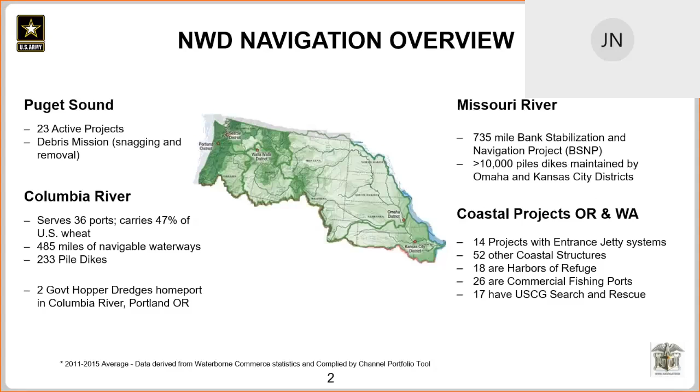And then we've got coastal projects, combination of nav channels, jetties, breakwaters that serve the Oregon and Washington coasts. Huge interest to local communities when it comes to serving the fishing fleets, the Coast Guard search and rescue missions, and things like that. So it's a lot of low-use harbors, but very regionally and locally significant projects, along with the Columbia that serves really the world.

Kevin touched a little bit on the budget.

This just kind of gives you a table that shows the trends of where money's been going overall. This is a breakdown of the enterprise as a whole. You can see what we've got as NAV percentages when it comes to the entire civil works budget and how that stacks up between coastal and inland projects. On the coastal side, obviously, you've got the Harbor Maintenance Trust Fund that funds a lot of the work. Inland side, seen a downward trend on that.

I think for the purposes of this call, most folks are probably just interested on the lock aspects of that, not necessarily folks that are going to be tracking Missouri River work. But it's a highly competitive funding environment, both coastal and inland. Inland's getting very tough because the trend is down and the work has increased. So like I mentioned with the Missouri River, big focus on that, a bunch of dollars being sunk into that, a couple other projects across the enterprise. That makes the pie a lot smaller when it comes to funding routine maintenance on some of our locks and dams out here.

Again, just kind of focusing more for purposes of this call. So Portland, Seattle, and Walla Walla, you can see the breakdown of the totals when it comes to overall NAV budget and how the district's fared the last 3 years. Still, this was buoyed a bit by the jetty work that we've done at the mouth of the Columbia River, but based on percentages, that's a decent chunk of the overall NAV budget that's coming to our region.

And then similar with commerce stats. So these commerce stats are updated regularly. This is the best information we have, but you can kind of get a sense of the snapshot of where the commerce is going.

I won't talk through these too much, I'll just leave them up for a little bit, but you can see what's moving through each district. The following slide has the next 2 districts on there, but you can see what commodities are moving through our locks and dams and our nav channels and get a sense. So obviously on the Columbia, we've got a big grain operation.

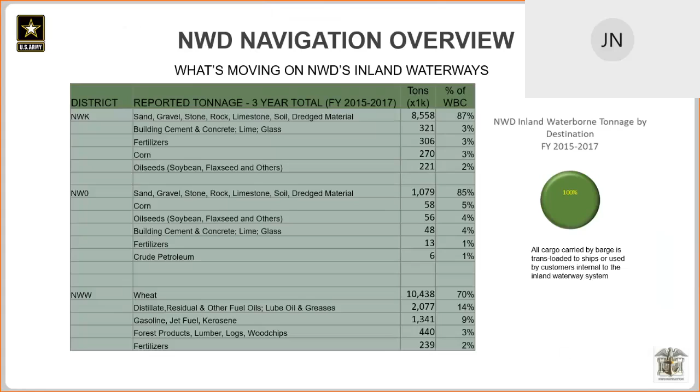Okay, now I'll just run through a couple slides that show a little bit more focus on each of the districts.

So, like I said, the inland side, you kind of forget about it sometimes because of the massive projects we have with the MCR jetties and other coastal work and the dredging on the Columbia River. But there are very critical maintenance needs on the locks and dams we have on the Columbia and Snake, and up in Seattle with Lake Washington Ship Canal. So it's a very unique system out here with locks and dams in terms of the scale of what we're dealing with when we compare ourselves to the Mississippi River.

So it's a big learning curve for a lot of folks, including myself, when it comes to trying to use the metrics for fitting our projects along with the projects across the enterprise, because the scale is so much greater. Failure on these dams is, in my opinion and a lot of folks' opinions who work out here, a lot more critical than a failure on a lowhead dam on one of the systems, maybe on the Mississippi. But it's a very big mission.

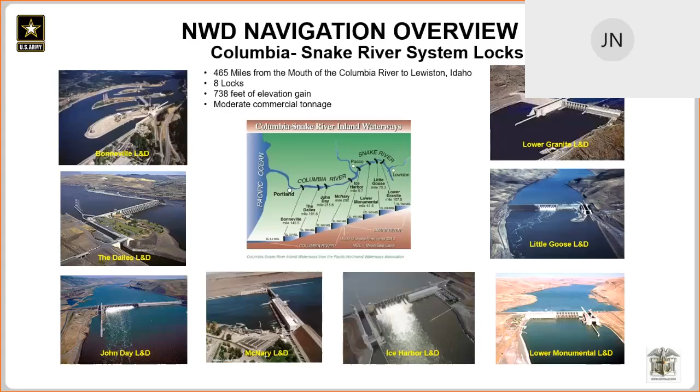When it comes to scheduling these lock outages, I think right now we've got tentative schedules that are pushed out to 2030, and we're trying to coordinate that work with a lot of the lead times to get some of the fabrication done and coordinate with industry and PNWA.

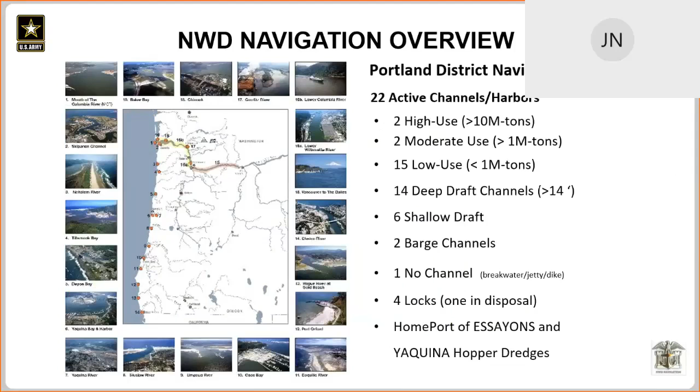Here's an overview of the Portland projects. I think a lot of folks have seen this slide at previous meetings, but it's a list of everything we've got going - a lot of small clamshell type work and Yaquina work that happens on the Oregon coast, and then the Columbia River, coupled with our jetty projects and pile dike systems.

So damaged structures coupled with low water are leading to issues. I think the latest I saw is that they've got 37 areas of concern as of last week. That was down to 12 at one point last fall, and it's spiked back up. So there's a lot of work to be done there.

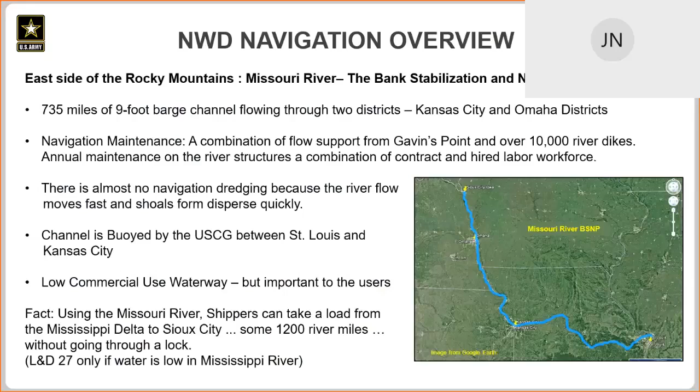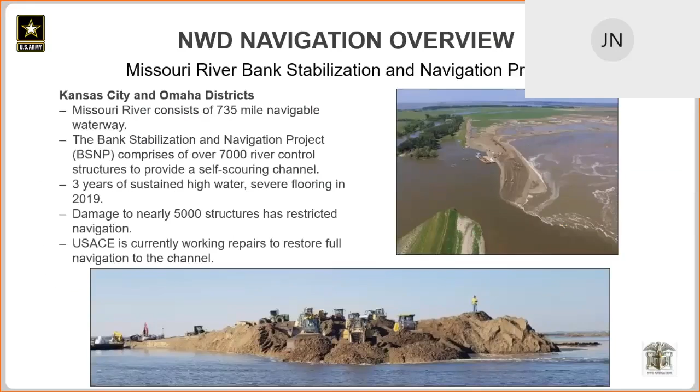And then just some more pictures that we've got of those channel training structures either failing or being repaired. A lot of the work's done with rock placement and a little bit of dredging that ERDC's done with their hydraulic dredge.

And that is a very brief overview. If anybody has questions, I'm happy to attempt them or push them to Mr. Ott.

Thanks, Jared. I don't see any questions in the chat. Does anyone have any questions for Jared?

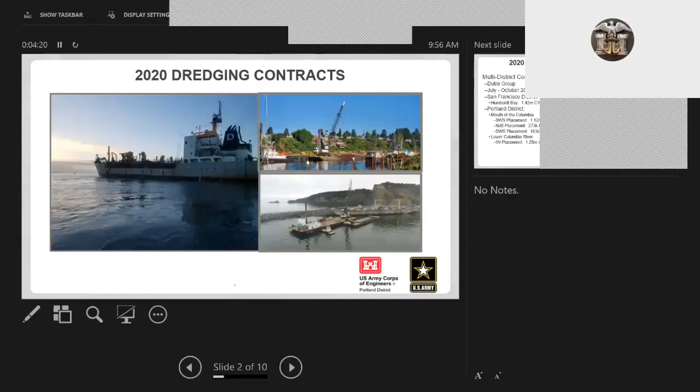All right, so just a run through on our contracts for 2020. We had a total, yeah. Hey, Terry, is there any way you can make your slides full screen? Yeah, I think so. I found this on the... Is that Siri talking back to you? Perfect. Yep. Perfect. Actually, I'm not sure. Display settings. Let me do this. Working through. I will switch to just sharing the screen instead. Is that better? Well, now it's smaller. Great. Okay, I'm going to switch this screen over to... Apologize, everyone. I agree with Dina. I think you just start choosing options under display settings and see if one works. Yeah, if you do the duplicate screen, when you push F5 and get it into the presentation, and then in the view say duplicate screen, it should give you the full screen. I may have just made this much worse for myself. It's going well so far.

Oh my goodness. How's that? Yay, great, okay. I'll just talk through these real quick. I just burned up 5 minutes trying to figure out technology, so strong start.

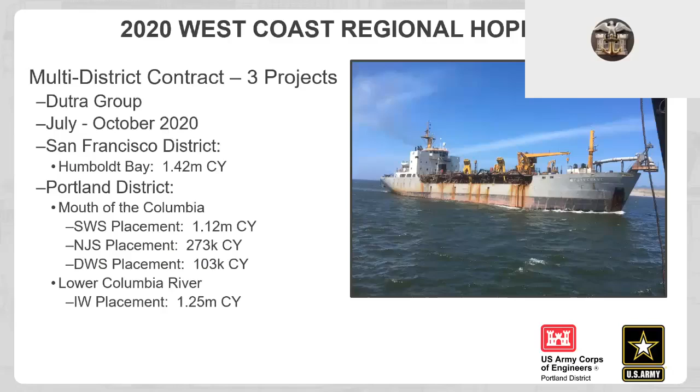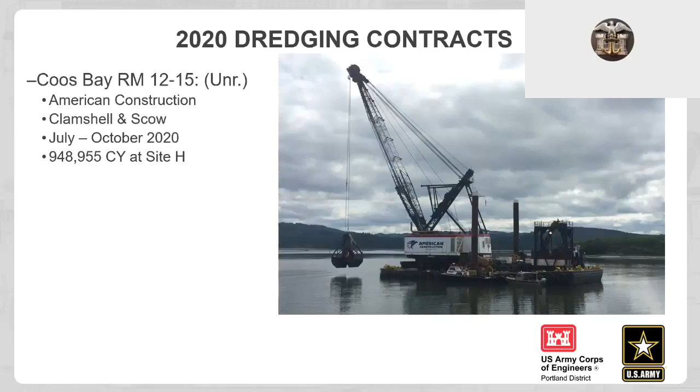Next contract was the Coos Bay River Mile 12 to 15. It went out as an unrestricted contract but was awarded to American Construction, a clamshell and scow project. Dredging was from July to October. Second year of doing this work, same dredge areas, working within the 1 million cubic yard environmental cap we have for placement. So just under 1 million yards taken out to Site H last year, another successful year.

Next contract was our Oregon-Washington clamshell. This is definitely an annual contract for us. The work locations change year to year, with the exception of a couple. It was put out as a small business set-aside contract, awarded to JE McAmis, another clamshell and scow project. Work occurred between August and October, with work at Chetco, Port Orford, Baker Bay, Chinook, and a few locations at Longview.

Chetco, I think we're there every 3 to 5 years. Port Orford and Baker Bay have both been annual for the last several years, and that's been really helpful to keep those projects working well. I think we've got a pretty good handle on how to manage the dredging there. Chinook, I think that's a 3-year cycle. We took quite a bit of material from Chinook last year, just under 140,000 cubic yards, so great to get that work done.

And then Longview, as I said, a couple areas there, both the federal channel and work for the Port of Longview under an MOA with them. So a good partnership there to get the work done in a timely fashion.

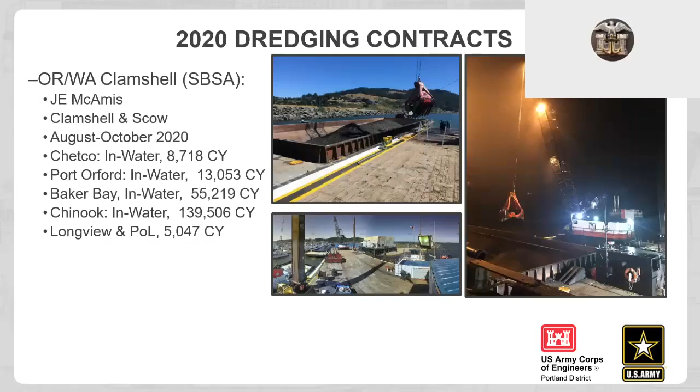The last contract we had for fiscal year 2020 was the Coquille Bandon Boat Basin project. Work was actually done in January of this year, but it was awarded in 2020. It was a small business set-aside contract awarded to Bergersen Construction. They utilized an excavator-mounted hydraulic cutter head dredge, pictured there. Pretty unique piece of equipment, new technology coming into our region, so pretty exciting to see that work.

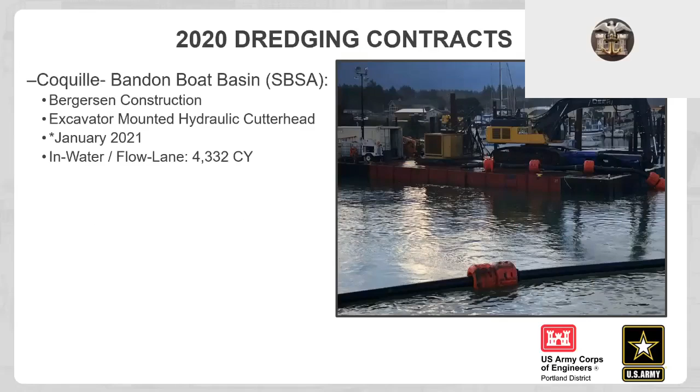Again, that work was done in January of this year. It was pumped to the in-water flow lane site just outside of the boat basin, and just over 4,000 cubic yards were taken.

The Dredge Oregon is our 5th contract. Last year was a fairly standard year, 147 days, more of a return to a typical year for them. The couple years prior, 2018 and 2019, were longer seasons. But last year was pretty standard, June to November, with 8 work locations, including a couple rehandle sites where we reposition sand with a hopper dredge, and the dredge is able to pump it either to a beach nourishment location or an upland site.

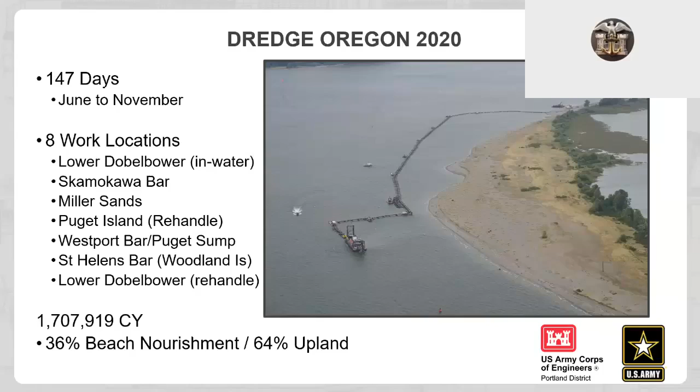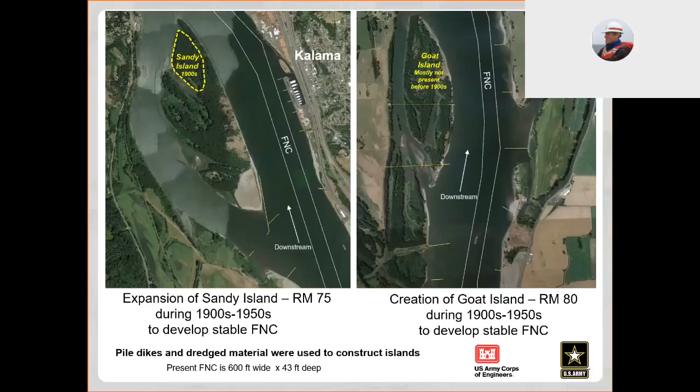But the underlying part is that these islands have ecosystem value in them now, really important ecosystem value that a lot of environmental enthusiasts on the Lower Columbia River think occurred naturally, but we created them. So there's the backdrop here.

Now, the motivation for present-day ecosystem restoration is the fact that 77% of the intertidal and riparian areas of the Columbia River estuary have been lost from the pre-settlement condition due to diking, filling, and hydrology modifications on the Columbia. That's what was motivating. We've got to address this 77% loss of habitat.

And in steps the dredge channel, the sediment that we use. Each year we dredge 6 to 8 million cubic yards of good, clean sand from the lower Columbia River deep draft navigation channel. We put about 15% of that sand in upland sites, about 10% along the shoreline, and 75% back in water, smartly.

We don't willy-nilly dump it in water. We're very careful. Jessica Stokey is very careful to direct where it goes so it doesn't cause problems immediately for the navigation channel. But the opportunity here is that we can provide reliable navigation while also sustaining sediment resources, morphology, ecology, fisheries, and other river functions that depend on sediment.

Solution: use dredge material to restore habitat, morphology creation. So I've teed it up for you all now, but the missing link is how do we move the sediment around? We have some assets that we use in the lower Columbia River, and Terry and others have mentioned them. Jared's mentioned them.

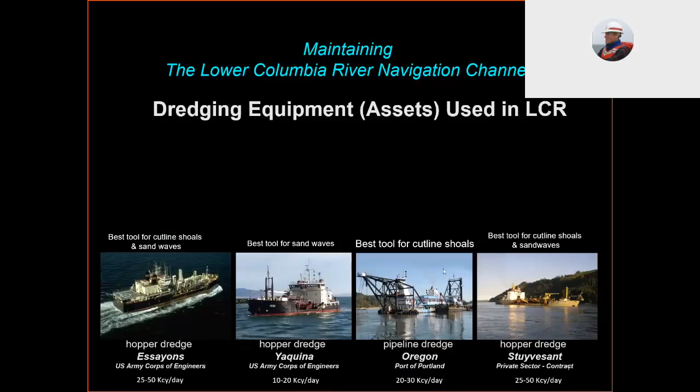What I'll be featuring in the talk today is how we used the dredge Oregon with the dredge Essayons feeding the Oregon with dredge material, so that the Oregon could pump it to our ecosystem restoration project, Woodland Islands, restoring habitat.

Why did we pick Woodland Islands? If you have questions why, direct them to Jared Norton in the chat, because he helped us narrow down from about 15 sites to Woodland Islands. Why? Because of its proximity to major confluences, which is good for ecosystem restoration—Lewis River, Multnomah Channel. It's right at the throat of a lot of things going on with rivers.

It's a moderate area for restoration. We don't want to build something big at first, because we're trying to step back into this. It's been 60 years since we've done something like this. We'll learn small and then apply it bigger. It's also close to a recurring shoal.

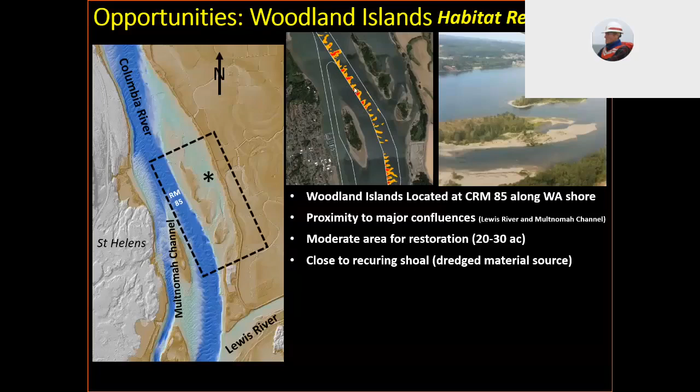We believe, and it typically turns out, every 2 or 3 years we dredge the shoal, and it ends up being about 400,000 yards. It has been. So that was a good thing.

And then it's a relatively protected area where we wanted to augment or build new restoration features on these islands. It's protected by pile dikes, as you see through here—this is the main stem river—and the area is not degrading. So it's sheltered and it's not degrading. Its existing habitats demonstrate good potential to increase habitat, and we believe there was a lack of real estate obstacles dealing with these islands. So that's why we picked it—it was a rational choice.

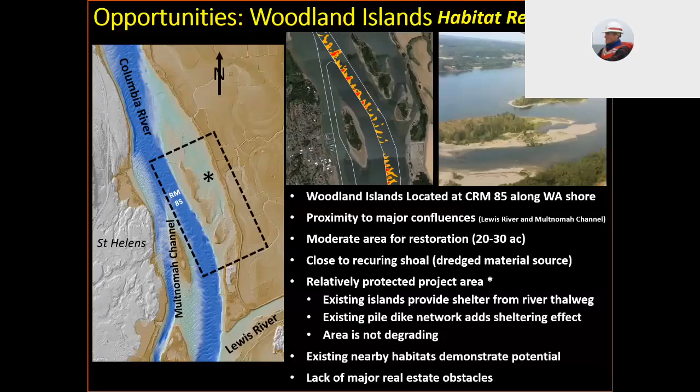I won't go into all the text here, but it is well documented—we have detailed files, actually reports with appendices. Our planning objectives for Woodland Islands were based on a 50-year planning horizon. This project has to work over the course of 50 years. The authority was under a Continuing Authority Project, Section 204, beneficial use of dredge material, which requires a non-federal sponsor, which was CREST. The idea was to increase habitat for juvenile salmonids and increase habitat for yellow warblers.

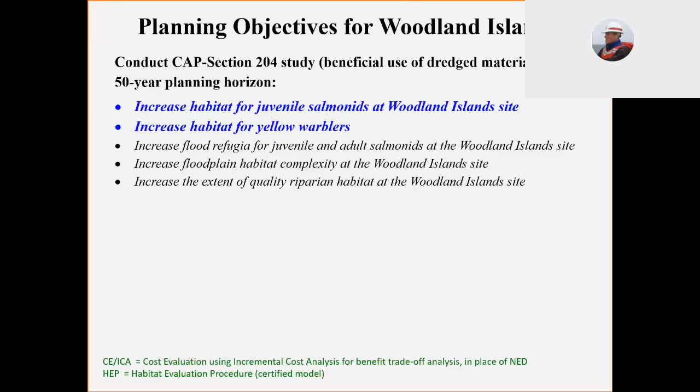This involves 2 types of terrain, very important: the salmonid habitat is in-water terrain, and the warbler habitat is kind of a transitional terrain up to upland. But the key here is that we had to use another method of documenting the benefits for creating habitat—we couldn't just use a normal benefit cost ratio because the benefits are very hard to monetize. They're ecosystem benefits.

So we used a system called incremental cost analysis with a habitat evaluation procedure. The point is we developed some habitat with a target elevation of 0 to 14 feet NAVD. To get to that point, we first had to build some base features from -10 to 0, and then we could build the cream on top—that's what we're after for the benefits there.

All right, I'm going to pause here for just a moment. Are there any questions anyone wants to verbally put out there? Hearing none, we'll move on.

So this is where it gets interesting. Consider the past to inform the present at Woodland Islands. Let's not make any mistakes, and the best way to do that is to see what the past did at Woodland Islands and emulate that. All right, so here we go.

What happened at Woodland Islands before we wanted to do this project? Back in the olden times, we built pile dikes, similar to what I showed you at Goat Island and Sandy Island—we built pile dikes, then we placed dredge material. In 1929, the pile dikes went in and they connected to an island, and then in 1957 we started placing more and more dredge material there.

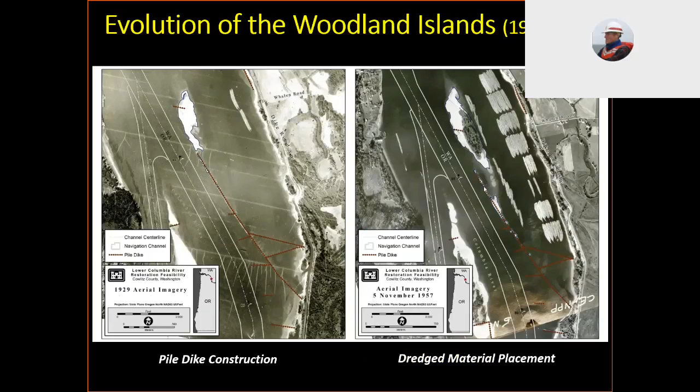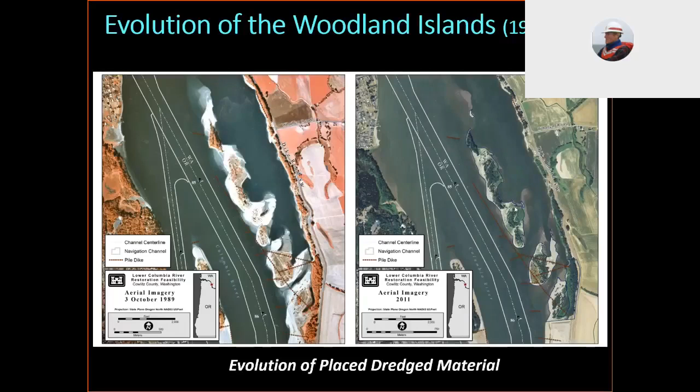And then until 2011, they changed, and now they have channels and have basically established vegetation, which is very important. It's not sufficient to just place the dredge material, as we saw here. We've got to get vegetation on the ground—that's a necessary condition, keep that in mind. So here's what the Woodland Islands look like now.

Now let's take a little safari—a real quick field trip over to this location to see what's on the ground during a freshet. What we see is these tidal waterways that during the freshet inundate areas. You see the grasses are inundated. This is a perfect place for salmonids to come in when they're migrating downstream in the spring and just feed and get bioenergized in these pools of water with good refugium food.

And then the highlands are about 4.3 meters NAVD. So this is all dredge material, placed in the 70s, early 70s. And when you take some shallow cores, you can see it's all sand. The top of it is brown, and as you get down further it turns to the gray dredge material. But this is all sand, and it's supporting vegetation. The key is to get into the right elevation zone.

That led us, after many alternatives, to these two features we wanted to build: a downstream feature and an upstream feature. The upstream feature was going to be 150,000 cubic yards, and the downstream feature was going to be 250,000 cubic yards, for a total of 400,000 cubic yards, which was the episodic amount we were planning on dredging from the St. Helens Bar a mile away.

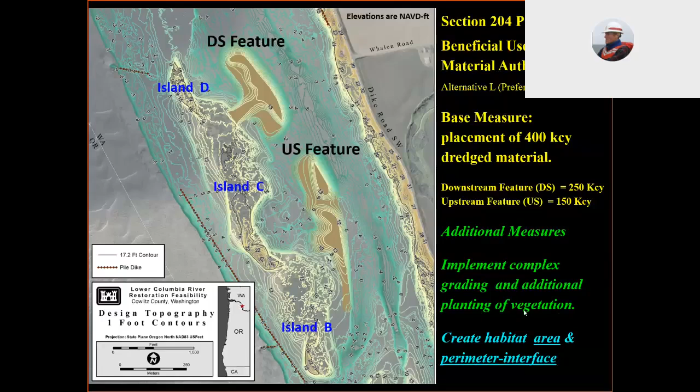Additional measures—I mentioned this before—we've got to get some grading on these features and vegetation. They've got to be vegetated to be productive. So there it is, that was the plan.

And this is how we're going to place dredge material. The dredge is somewhere down off the page, but the pipeline was going to come up, go underneath the nav channel, which it typically does as a submerged pipeline, construct a landing zone out of dredge material, and then have the pipeline go into the downstream feature, and then a Y with the pipeline go into the upstream feature, and maybe some beach nourishment to allow the pipeline to be safe on the beach.

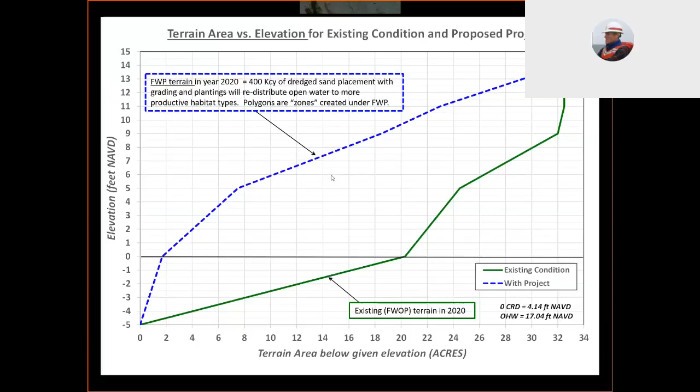That was the plan, and what it was going to do is lift up the elevations. This is acres versus elevation, showing the precondition and then the post terrain after we create these two features. What we're going to do is create zones of habitat by literally lifting up the terrain using dredge material.

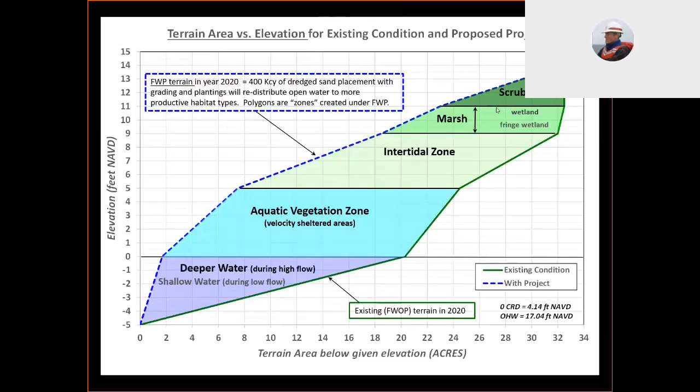That's with no effect of sea level rise or changed hydrology. So the key here is a 50-year planning horizon. We want to embrace potential effects of sea level change and possible regulation changes on the Columbia. We don't know what those are going to be, so it's a scenario-based situation, and I'll show you that in a minute.

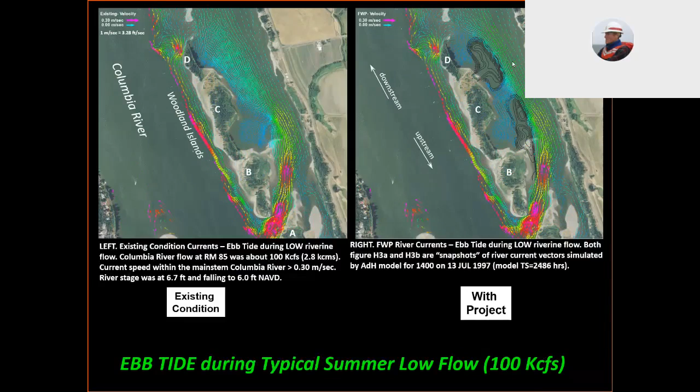So we understand that, but that's a really big flow event. What about just a normal summertime situation, ebb tide during 100 KCFS, a late summer flow? You can see existing condition on the left and with-project on the right. Not a lot of change. There's going to be some changes in and around the islands themselves, but the main flow area doesn't change much, and we don't want to create significant adverse changes.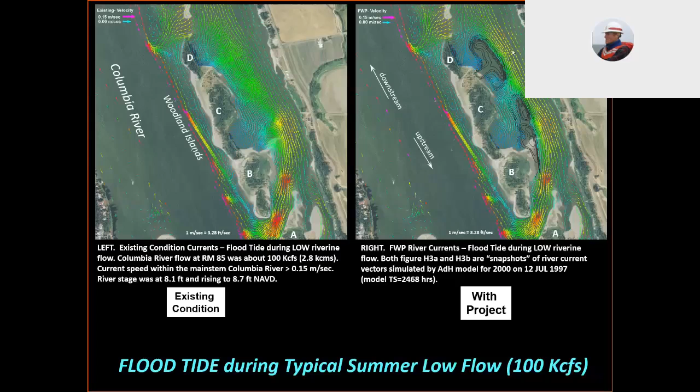Same thing with the flood tide. It's interesting—even at river mile 85, tides reverse during the summertime low flow. Here you see the arrows pointing upstream, and there are some changes between the no-project and with-project condition. We evaluated those changes and determined there was no significant adverse impact.

Bottom line is that the river stage is not affected by this project, so the project does not create increased river stage, which is good. Currents within the area—the project does create a little bit of increased current in the main channel for the peak river flow condition, but it's not an extreme change, and we assessed that through some sediment transport assessments. It's not a big deal.

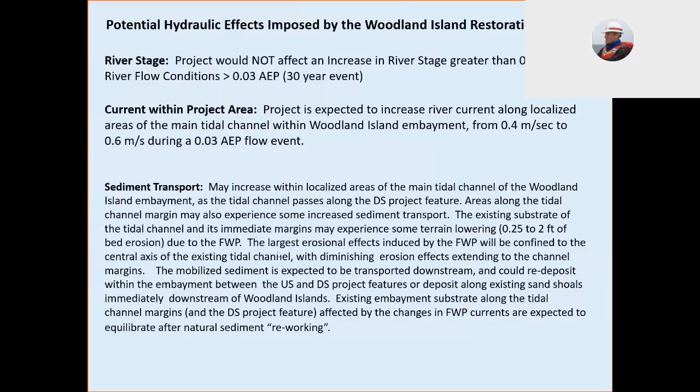So we did our homework. No big changes expected—it's important to do that. Some projects can't afford that; CAP projects usually don't have the budget to do that. But in this case, what we're trying to do is step back into something we were doing on a regular basis 60 years ago, and we wanted to not make any mistakes the first time, so we did some extra work on that.

So this is the project implementation. In 2017, the report, the CAP study, the feasibility report, was completed. It was reviewed, division reviewed it, and we got comments from everyone. Comment and answer time is always so much fun, but it made the project better. It was completed in 2017.

The assumptions were that we have sufficient dredge material available when we were to go implement in '19 or '20 for the project needs—400,000 cubic yards to build both features. We assumed, through some rationale, that the pipeline was attainable to be deployed to build the upstream and downstream features. It turned out to be a problem. And then we assumed that turbidity would be minimal, due to the experience that we normally place dredge material using the same equipment on the river side of islands where the river is free flowing. So those assumptions got tested.

Here's what happened. In reality, in 2020, when we tried to implement this, we ran into some walls and had to adapt in a hurry, starting in August, in order to construct in September. In August, we realized the dredging volume at St. Helens Bar was only going to be half as much as what we needed. Logistic needs onshore required almost 40,000 cubic yards just to develop the landing area and beach support for that pipeline to go to the upstream feature. And then a real estate easement came up and was imposed on us near the pipeline landing area.

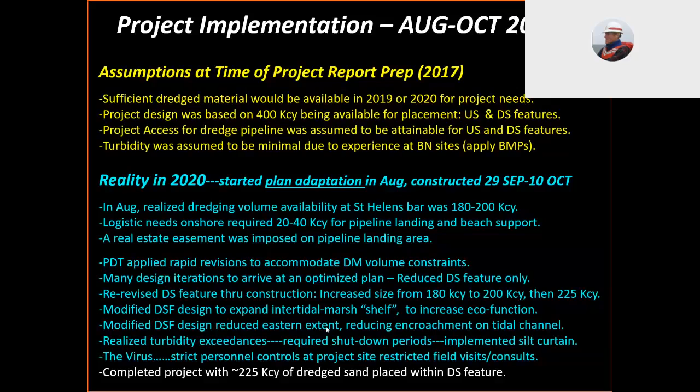But we completed the project with 225,000 cubic yards of dredge sand placed within the downstream feature. We adapted our pipeline situation because we weren't going to build the upstream facility, and so that's what we did.

This is what the pipeline outlay looked like, and this is how we started the project. This is the riverside looking to the shore. The submerged pipeline comes up to a floating barge, and then it goes along a landing area. You see the landing area that the Port of Portland created, and then that landing area feeds to the island.

And then on the other side, the bay side of the island, we started building the feature, built it out, created a shelf. This is the existing woodland island with vegetation, and that's the new feature we were creating at the time.

The bottom photos just show how the dredge material is placed. You can see the discharge point and the dozer working. That used to be 10-foot depth of water, now it's a dozer running around moving material.

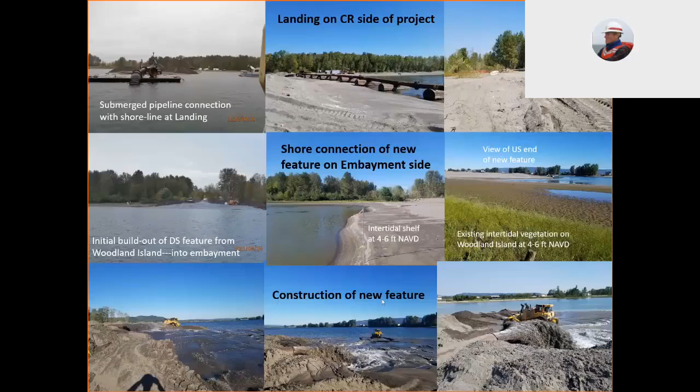We created the base, and then on top of the base, we created the habitat terrain we wanted to create. It was very efficient, started September 29th and completed October 10th.

So here's some final pictures. This is near the end of completing the work, 220,000 cubic yards placed. This is a view downstream at the downstream end of the feature, and this is the completed work on the upstream part of the feature looking downstream.

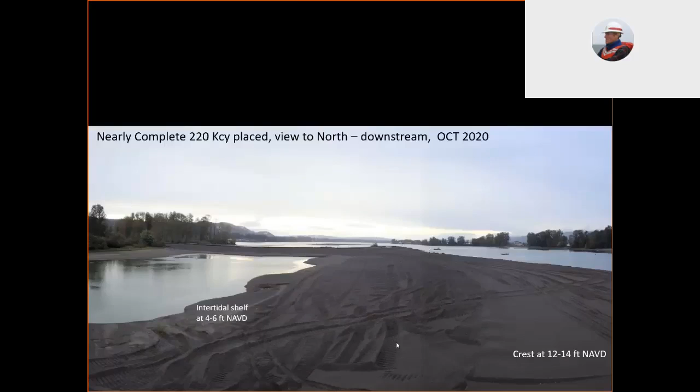So you see the long feature, this is the T-bone, we call it the T-bone. This is the shore connection, and this is the T-bone part, the shelf, and then the crest at 12 to 14 feet NAVD.

The thing is, this dredge material had less than 4% fines, probably more like 2% fines. But it just takes a little bit of fines to make a lot of turbidity, and that's what was kind of a challenge for our operation.

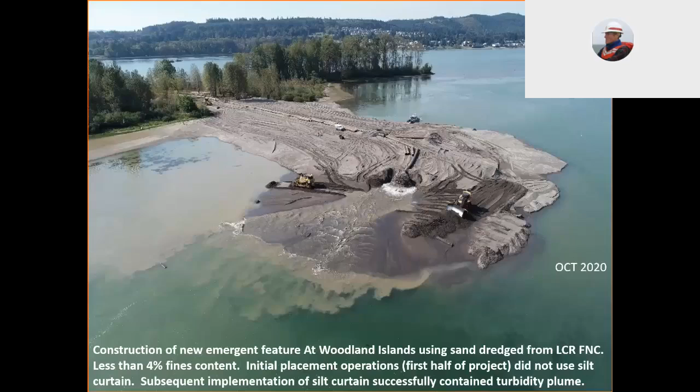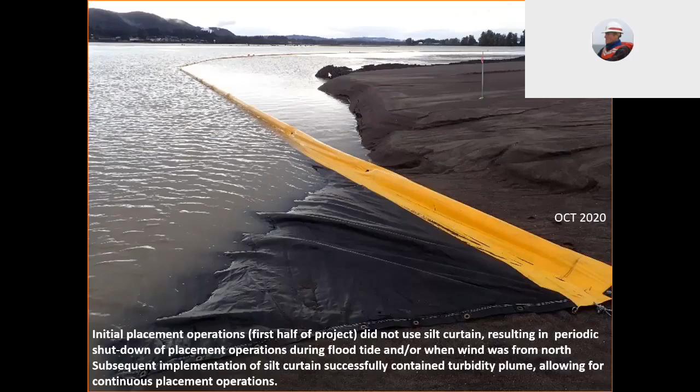We used a silt curtain after shutting it down a couple of times, and that worked out really well. It's got a little floating boom on it, and then there's a curtain that hangs below about up to 6 feet, maybe 8 feet. Because the water depths were shallow, that really held the turbidity within our area of placement, and the Port of Portland was able to be really efficient after that.

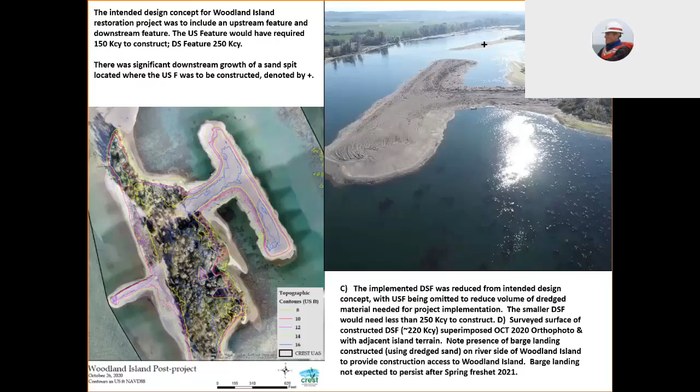The key is vegetation, and making sure we put the right vegetation in the right spot on this new feature we create. Learn by analog, learn what's already out there. And so that's what we did. Willows and dogwood are in this elevation zone. Grasses, sedges, and scrub shrub are in these zones through here. We're basically learning by seeing what grows there, and that's what we're going to plant in those elevation zones for the new feature.

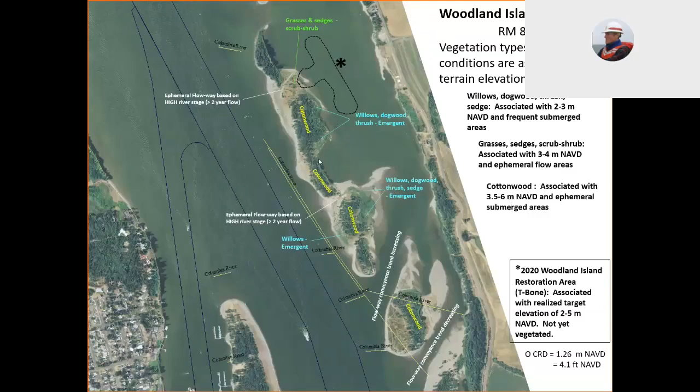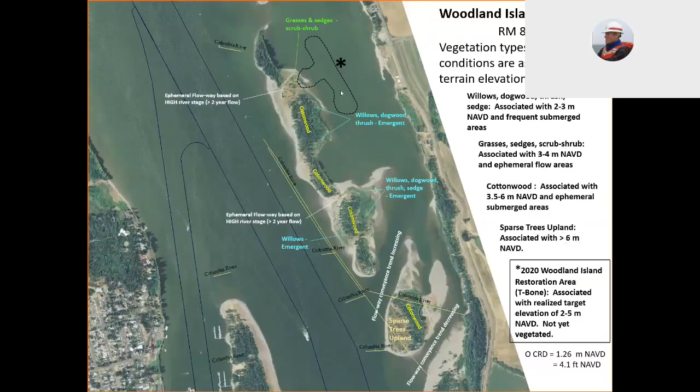Cottonwoods are further up, a little bit higher, but they get inundated during the 2-year flow. Then sparse trees upland. This little area doesn't have many trees, and fortunately we did not create any elevation that high in this feature. That's up pretty high at 6 meters NAVD, and we didn't go anywhere near that. So that's good. We expect everything we plant, if put in the right zone according to what we've seen, to grow on the new feature.

That's what the new feature looks like in terms of elevations, and you can compare it to where these other things live and grow. We're going to have stuff growing down in the margins on that shelf, and up on the crest we'll have the cottonwoods. The top elevation for this feature is about 14 feet NAVD, and the ordinary high water is maybe a little bit higher than that. The point is, this feature gets submerged by 1 foot during ordinary high water events, which are the 2-year floods.

And that's exactly what we want. We don't want it to wash away, but we do want it to be inundated from time to time.

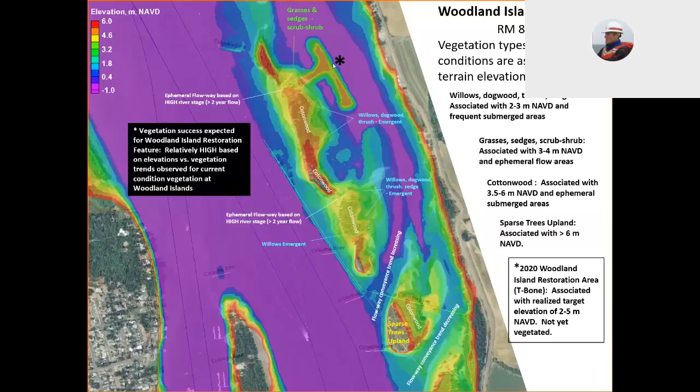I just want to emphasize that this is the first project we've done in 60 years of purposely building islands or island features. So we had to relearn some stuff. Now that we're starting to relearn, getting this relearning curve going, we need to apply these lessons learned for other projects. This is not just a one-off. We don't want to just be happy with this. We got more work to do.

77% of the riparian area is gone, so we have lots of work to do. Seek out previous Lower Columbia River, LCR, experiences. That's what we've done, but there's more lessons to be learned from this time period of 1900s to 1950s. That'll help us manage risk.

Implement projects that have small to moderate scale before going big. That's what we did here, and that's what we should continue to do until we get really confident that we can go big without adverse consequences.

Include resilient elements in our features. Address high river flows and climate change up front when we design these things. Evaluate potential effects of the project on adjacent areas, so do the hydro modeling. You don't have to go whole hog, but do enough in order to manage risk, understand the risks we're looking at, so that we can say we're pretty confident we're not going to create a problem.

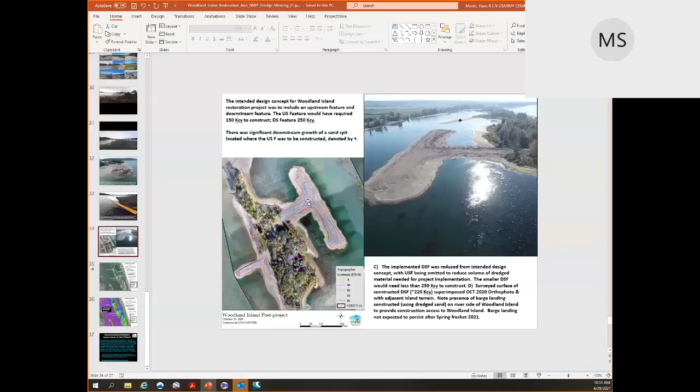Yes, that's a very good question. We had our GIS section get into that. We have the terrain, they just haven't been able to get the bandwidth. This other project we're working on, the DMMP, is taking a bit of bandwidth right now from some of our other resources, but it's on GIS's task list to do.

And Mike, that's exactly the point, is to establish what the baseline footprint is in the area of the downstream feature we created, and then what the actual lift was. I can tell you the acreage from both features was initially going to be about 25 acres total. And of just this downstream feature we built, its acreage is somewhere around 12 acres. So everything's relative to that change, and we'll see.

The key is, though, the other thing is the cost. So we created less, but we spent less to create it also. If we actually pumped 400,000 yards, that's time and money, but we only pumped about 240,000 yards all said and done. So it's less cost, and we built less of the feature. We'll look at that, and maybe next year we'll update what's going on at Woodland Islands with a 5-minute presentation on it. Over.

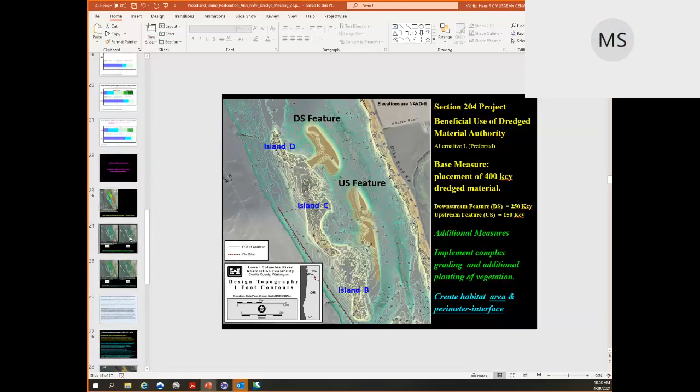It might possibly be during the biggest flow events, and so the reduction in velocities is discernible. I think we could have done a calculation of continuity of how much flow is going back here versus in the channel width before and after the project. We did not do that, but based on the area, the channel area, depth and width, and the increment in flow increases versus the volume of flow going through the main stem Columbia, it's really small. I would say it'd be inconsequential.

We actually did do a continuity check, a flow volume check, of what actually goes between the cross section right up here versus the cross sections all through the island, and it's a very small proportion of flow that goes behind the current island chain versus going down the river. It's like less than 0.4%, ridiculously small. So even though there would be a shunting of flow going back, an increase of flow through the channel during this high flow event, it'd be inconsequential in the channel. Over.

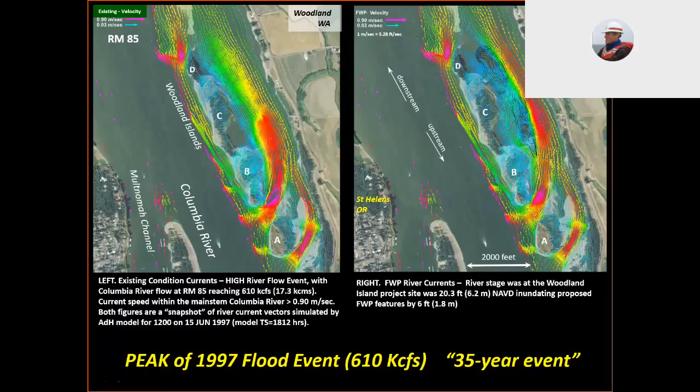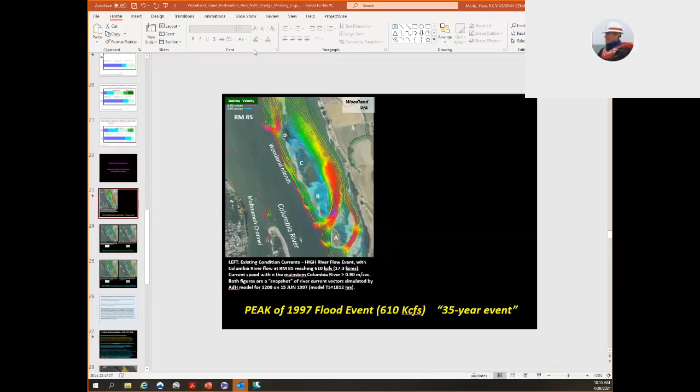Awesome, thanks. Yeah, I believe that's it for questions. Great, hey, thanks for y'all's attention. Again, I'm privileged to present this on behalf of the whole team. It was really a labor of love that we all worked on. And that ends my presentation. Thank you.

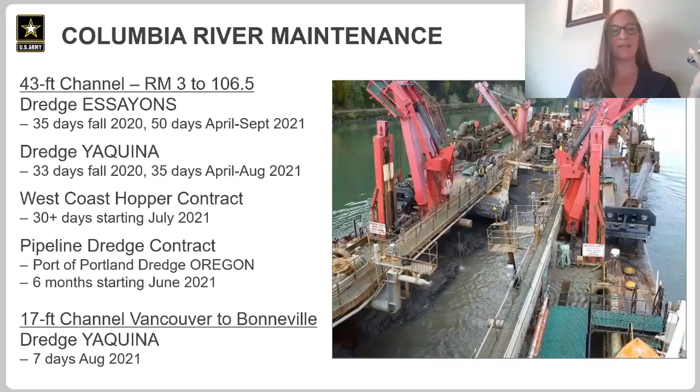So I've asked for an evaluation by our hydraulic engineers here in the district, and I'll have more information to share on what the best plan is to take care of that shoal. And I think that's it for that slide.

We have a clamshell dredging contract this year. We're calling it Oregon and Washington Clamshell. It's got work on the coast and work in the Columbia River. The plan is to advertise that in May, and then dredging, the window is between July and December.

Order of work will start at Port Orford on the South Oregon coast, and then move up to the Baker Bay Channel near the mouth of the Columbia. Those are the base items, and then we have some optional work areas in this contract, and those are dependent on really if shoaling develops and if we've got the funding in place to do the work.

So that includes the Longview Turning Basin, which is part of the Deep Draft Channel, and then we're working on an agreement right now with the Port of Longview to include the dredging of their berths as part of this contract also. The Old Mouth Cowlitz is right next to the Port of Longview, the federal channel there. And then the Lake River Channel is between Longview and Vancouver. I think that's it.

Okay, environmental coordination. So the side channels shown here - Tongue Point, Elochoman Slough, Lake River - and the 20-foot deep channel in Oregon Slough haven't been dredged by the Corps for many years.

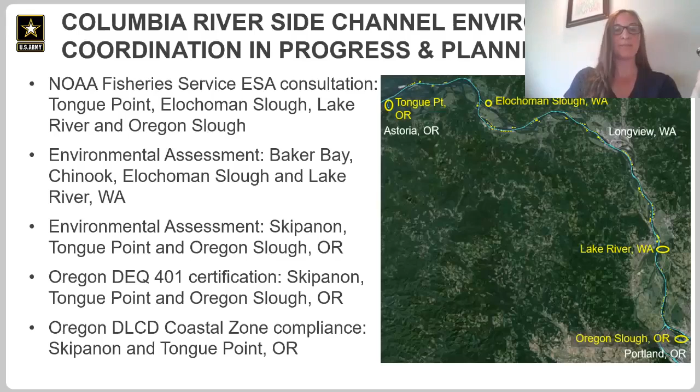And then there's some additional work we're going to do with DEQ to get a 401 certificate and to get our coastal zone compliance done with Oregon DLCD for those Oregon side channels. And that is all in progress.

We've received great funding support for the past few years for the pile dike. I've got a photo here showing a pile dike with the king pile marker at the channelward end. The king pile marker is a really tall pile that's visible even when the river levels are high. It's meant to be a visible marker of the pile dike location where it's submerged. The old king piles were those tall timber dolphins, and the new king piles we installed last fall are these single steel piles with a sign on top that you see in the photo.

This year, we're doing everything we can to be ready for full functional repairs at the highest priority systems - Sand Island, Baker Bay, Cottonwood Island, Miller, Rice, Skamokawa, and then Washougal up in the barge channel. That involves going through the evaluations, designs, getting plans and specs ready. The construction timing is really going to be dependent upon future funding for construction. We have design funds, but not construction funds yet to start pile dike repairs.

One thing I wanted to mention that wasn't in my slides: for the lower Willamette, there's a federal navigation channel. We don't dredge it very often because there's a lot of environmental compliance involved, being in a CERCLA site. But we are in the middle of the sediment evaluation process for the two highest priority shoals in the Willamette River, Post Office Bar and the Albina Turning Basin.

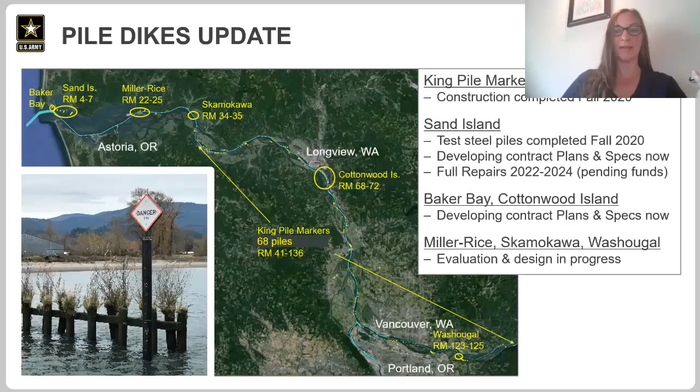We also have environmental coordination in progress for the pile dike. Along with the engineering side of design and plans and specs, we also need to get our environmental compliance in place. The main pieces going on right now are Sand Island pile dike and Baker Bay pile dike. Sand Island, we started the process back in 2020, it's ongoing in 2021, and we're anticipating completion of the last pieces in '22. Baker Bay is getting started this year with our environmental compliance, and hopefully we'll also be finished with that in 2022. There's a lot of coordination to do with federal agencies and state agencies for these projects.

My last slide here is a Lower Columbia River Channel Maintenance Plan. This is a plan for how we're going to maintain the 43-foot channel, the deep draft ship channel in the Columbia River, for the next 20 years. We need the plan because our existing dredged material placement sites are filling up, so we're going to need to identify more places to put the material.

To get back to Sally's question from earlier about what is limiting in-water placement, this is one way we're looking for opportunities to place material along more riverbanks than what we have approvals to do now, and in shallower water depth. The benefit of that is we can keep more material within the river system without increasing the amount of shoaling and dredging that we'll do in the channel. So this plan is really focused on that.

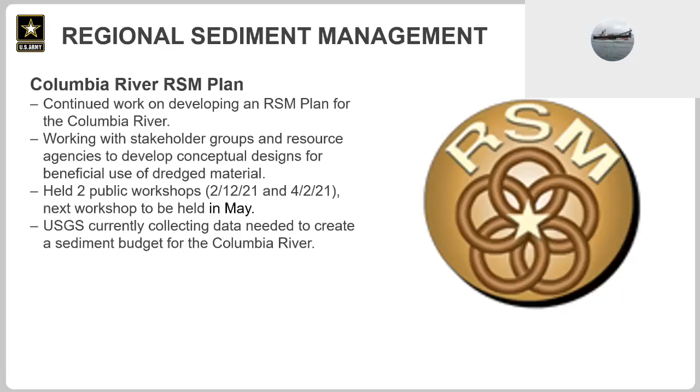And I believe that's our last slide. So we'll open it up to questions.

Let's see, I see Rod had a comment. Woodland Islands project is an odyssey. And then he just thanked everybody.

And I don't see any hands raised. So at this point in our agenda, we are going to move on to the sediment quality team, unless there's any questions or comments for Greg, Jessica, or myself.

Okay, James, I'll turn it over to you. Thanks, Kate. This is James Holm. James McMillan is going to be sharing our presentation for the sediment quality team.

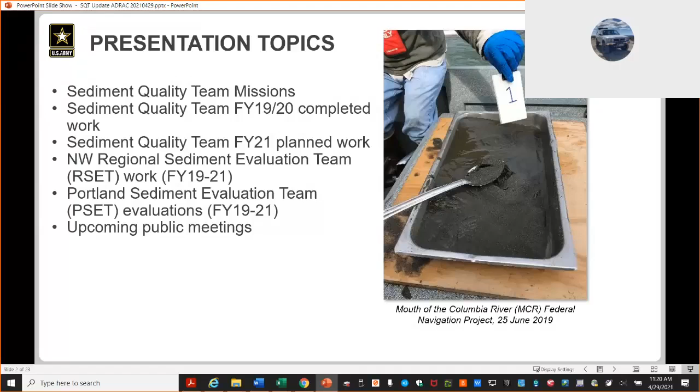Structure of our presentation: we'll cover the last two years, FY19 and FY20, since we missed an annual dredging coordination meeting last year, so we're putting it all into this one. We'll also highlight work planned for this fiscal year. James Holm will discuss what's planned for the Regional Sediment Evaluation Team and what's been done, then go over the Portland Sediment Evaluation Team work. Finally, we'll let everyone know about some upcoming public meetings on the horizon.

So a little bit about the sediment quality team: we support our navigation program by performing sediment characterizations for compliance with the Clean Water Act and the Ocean Dumping Act, also known as the Marine Protection, Research, and Sanctuaries Act. Our team also coordinates with the EPA on the use of the ocean dredge material disposal sites along the Oregon coast. We're also a technical resource for any regional sediment management initiatives in the district.

We're the center of expertise for implementing the sediment evaluation framework for the district. As I mentioned, James Holm is the team leader for the Portland Sediment Evaluation Team, co-led with Bridget Lorman from the US EPA. James and I both also sit on the Northwest Regional Sediment Evaluation Team representing Portland District, a larger interagency team covering Oregon, Washington, and Idaho, with both state and federal representation.

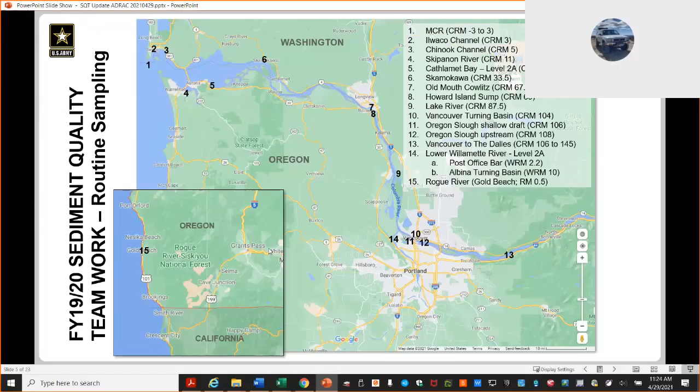The December before last, we sampled 2 critical shoals in the Willamette, one at the post office bar at about River Mile 2.2, and then also the Albina Turning Basin at River Mile 10. The only coastal work we did in that time period was to characterize a small shoal in front of the Gold Beach Boat Basin in the Access Channel, and that was performed in 2019, I believe.

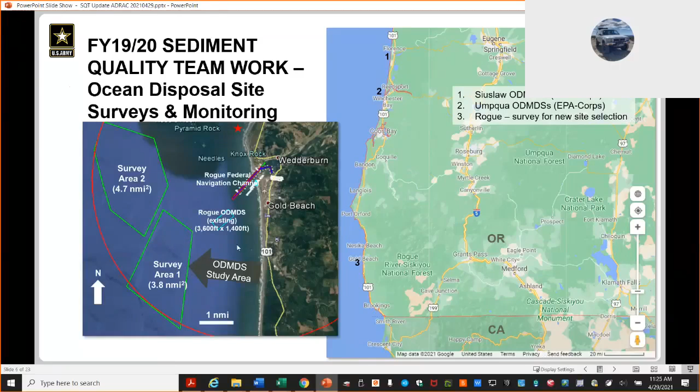With respect to ocean disposal site surveys and monitoring, back towards the end of 2019, we participated in the EPA-led surveys for the Siuslaw ocean disposal sites and the Umpqua ocean disposal sites. We also performed a baseline survey to select a new ocean disposal site at the Rogue River at Gold Beach, and we've so far narrowed down the area to an area just to the southwest of the existing disposal site.

That's still a work in progress, and we're coordinating with the Environmental Protection Agency on that. Being the district's sediment center of expertise, we also do some work on our reservoirs and dams, so we did some work at the Bonneville Powerhouse 2, Detroit Reservoir, and Cougar Reservoir as well.

James Holm, you want to talk a little bit about this BLM project? Yeah, so we also did some work for other federal agencies. For BLM land management, they have a small dam called the Holt Reservoir, and they're looking at doing some repairs to that dam or evaluating different options. So they need some help doing a sediment characterization of the material stored in the dam. We helped them with that a couple years ago and wrapped up that suitability determination memo in 2019.

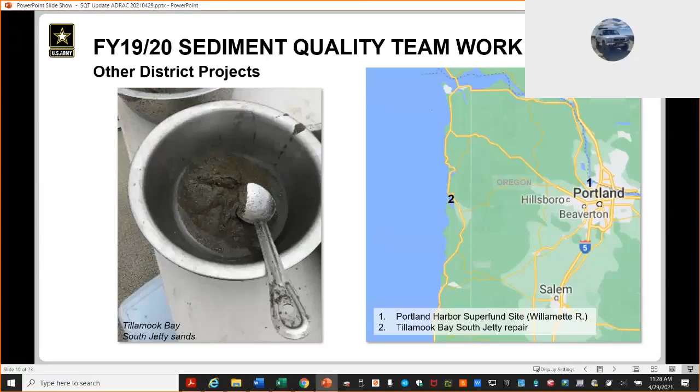I'll talk about that a little bit more in depth when we get to FY21 on the other work we do for our district missions in the Lower Willamette. Okay, very good. We also performed some sediment investigations in support of the Tillamook Bay South Jetty repair there for an offloads facility.

So for this year, we have a really busy year, almost as busy as the last 2 years combined. We have all of these projects to sample this year. Tongue Point has already been sampled, but we wrapped up the biological characterization early in this fiscal year.

Pardon me. Let's see, then, oh, sorry. Somebody was making lunch and I had to shut it down.

This year we also have plans to use biological testing for those 2 shoals in the Lower Willamette River. We're wrapping up Oregon Slough shallow draft channel sediment testing. Sediment sampling was just performed at Tillamook Bay and Depoe Bay earlier this week. In June, we have sediment sampling at Coos Bay and the Charleston Channel, just for the routine sediment characterization of that federal project. And further down the southern Oregon coast, we have Coquille River, the Rogue River, and Chetco River that we'll all be sampling this year.

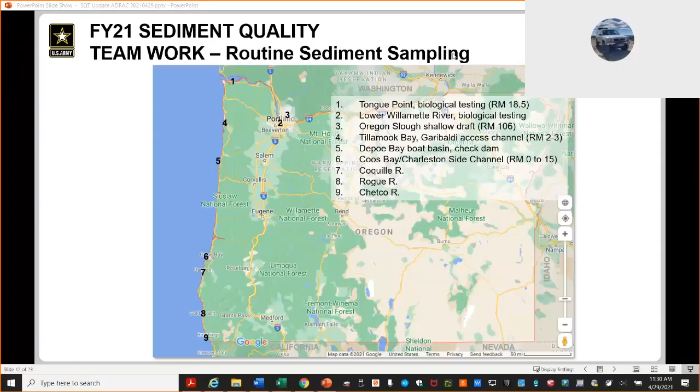This year for ocean surveys, EPA has a major monitoring event planned for, I believe, September is what we're shooting for. It may occur earlier, I'm not sure yet, and we'll be participating in that. The Corps has a contract in place to prepare the site management and monitoring plans for the Siuslaw ocean dredge material disposal sites. We're also working with EPA this year to expand Coos Bay Site H, collecting the information to support the expansion, and we'll be working with them over the next couple of years to get that site expanded. Finally, as I mentioned earlier, we'll also be looking to select a new ocean dredge material disposal site at Rogue.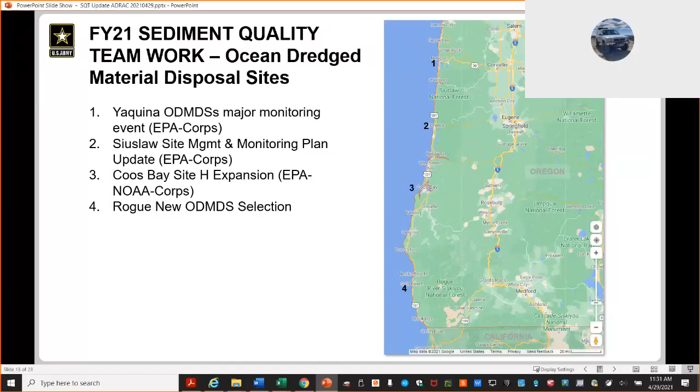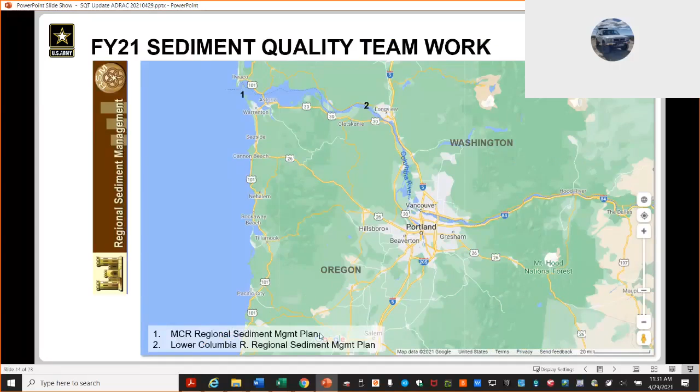In terms of regional sediment work this year, we're engaged in the Lower Columbia River Regional Sediment Management Plan, and we're currently just in the early review phase for the mouth of the Columbia River Regional Sediment Management Plan, but that's still a work in progress.

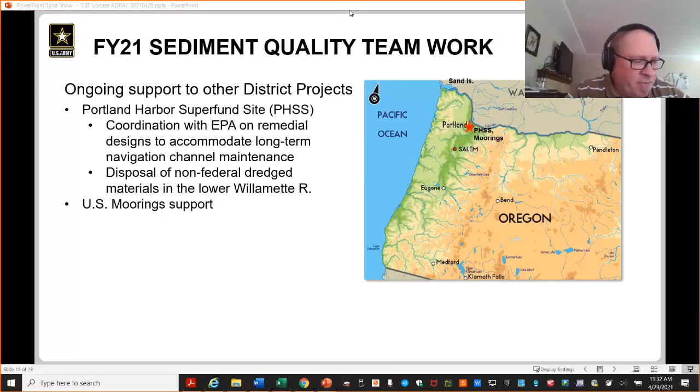Thanks, James. Two things that we do for the district in Portland Harbor, Lower Willamette. We have a lot of coordination weekly, sometimes daily, with EPA and Oregon DEQ for dredging and disposal of sediment that comes out of Lower Willamette River. Thinking at the project level as well as long-term, what do we need to help support EPA achieve their remediation goals in Portland Harbor. So always a challenging topic and always enjoyable to work with EPA, ODEQ, and other agency partners on projects. Every once in a while we also provide support to U.S. Moorings as they go through their work on that site, particularly what we can do to help support coordination with EPA as well.

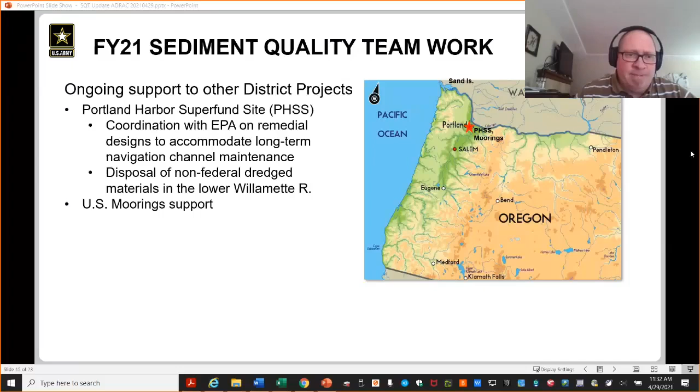Moving forward for the rest of this year and into next year, there'll be some minor updates to the SEF, things like typos and clarifications, just minor changes. So we're collating what needs to be changed and updated, and then based on what that is, maybe we'll have a new version of the SEF, or maybe we'll just do a minor errata update, something like that. So that will be figured out in the next 1 to 2 years.

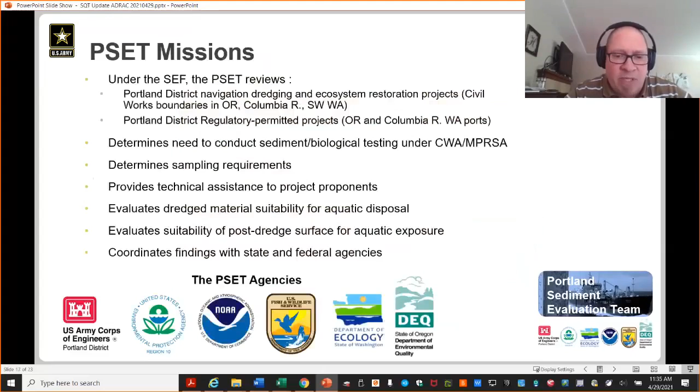Listed at the bottom of that slide are the particular agencies of the PSET: the Corps, which is myself and Dominic Duvalier; EPA, which is Bridget Lorman; NOAA is Tom Houseman; U.S. Fish and Wildlife is Jeremy Buck; Department of Ecology is Laura Noye; and then with ODEQ is Pete Anderson.